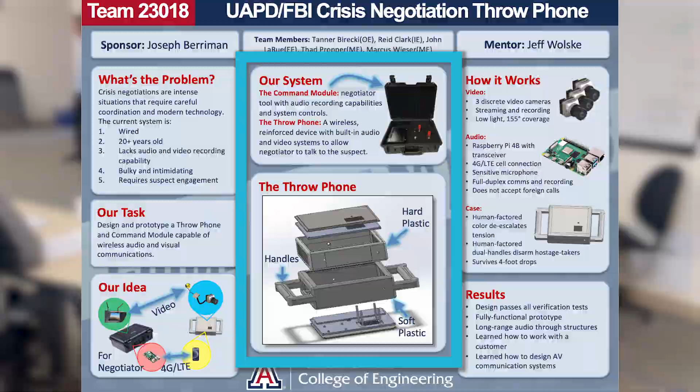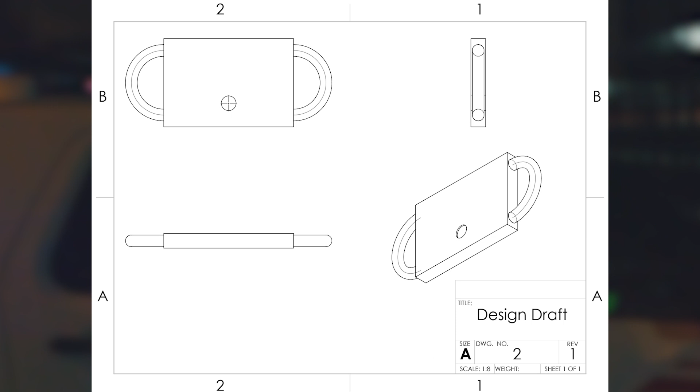We considered multiple different designs and different concepts and their uses. From a trade study, the team determined that a simple Nokia-style phone was best, and then we had the idea of adding handles to this design as a piece of social engineering. Negotiators are trained to keep their right hand free at all times, so they have quick access to their firearm. Using an inverse psychology, we want to provide suspects with something to hold in both hands to keep their hands occupied from holding a weapon. The ability to include these handles to assist in the human side of the de-escalation process sent this design far ahead of the others. Here is the heart of our solution and how it works, starting with the audio subsystem.

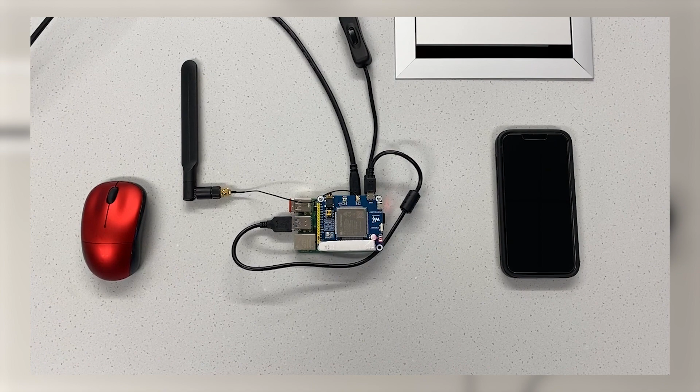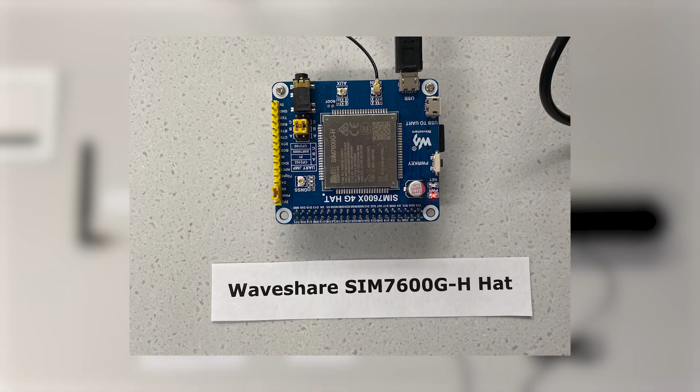The brain of this subsystem is the Raspberry Pi, which interfaces with all the other components as you can see here. It receives power from this battery, which powers the whole system. This is a transceiver. It allows the command module, which is the device police negotiators will use, to communicate with the throwphone. This transceiver utilizes a subscriber identity module, or SIM card, like the one in our cell phones, to connect to a 4G mobile network, allowing it to communicate with the command module effectively and from a long distance. It will receive audio data sent by the throwphone and process it via the Global System for Mobile Communications module, or GSM module for short, sending the data as an output to the headset.

The throwphone utilizes a cell phone that will automatically accept a call from the Raspberry Pi from the command module. These speakers in the throwphone produce audio at 90 decibels from 1 foot away without the suspect ever interacting with the throwphone. This assures that they always hear the voice of the police negotiator even if they don't want to. This setup allows both the police negotiator and suspect to communicate over a full duplex channel, meaning that they can speak and listen to one another simultaneously. This is important so that negotiators never miss what the suspect is saying. And in this subsystem, the throwphone will transmit video data to the command module.

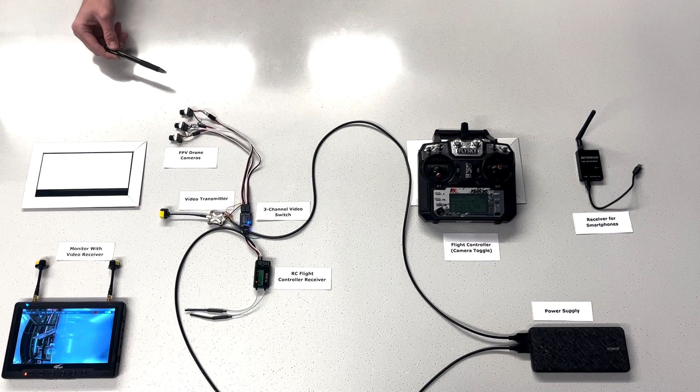We have 3 155-degree field of view cameras on the phone that connect to a video switch. These high-quality cameras are normally used on racing drones and boast excellent low-light performance. The cameras are connected to this multi-viewer, which allows the police negotiator to switch camera perspectives from this controller. The controller connects to the multi-viewer via this receiver.

The multi-viewer sends the video stream of the chosen camera to this antenna. The cameras, multi-viewer, receiver, and antenna are all powered by this 5-volt battery. The antenna transmits the video signal, which can be picked up by this monitor, which also contains a video receiver. This will be stationed by the command module for the police negotiator team to use.

Additionally, the video signal can be picked up by these receivers for SWAT to access the video feed. We want the SWAT teams to be able to see into the scene so they can discern things like where the suspect is, how agitated they are, and whether or not they are armed. This subsystem runs parallel to the audio system so that both operate individually.

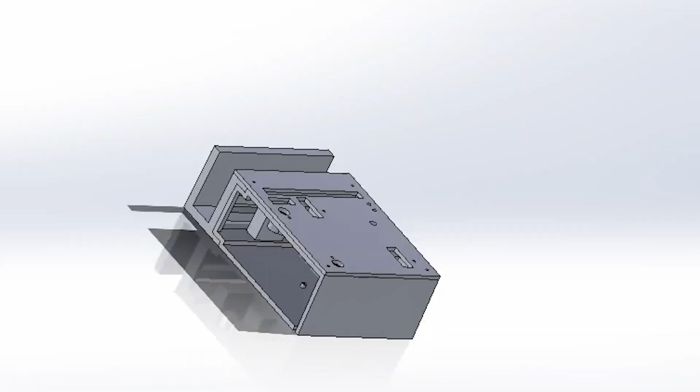The command module contains a transceiver, microphone, and Raspberry Pi for audio, and a receiver with a monitor for the video. Instead of speakers, the police negotiators will plug in headsets to listen to the suspect. The board on top is designed by our team for this project to make the command module easy to interface with. This is all housed in a hard case, which is very familiar to the police force as it is a similar style of case that they have used in the past. And there are no cameras on this device.

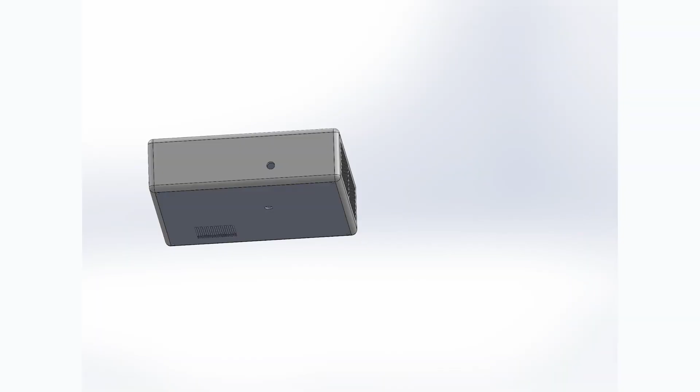A switch here allows police negotiators to turn on and off microphones to control when the suspect is able to hear him. Notice that there is no switch like this on the throw phone. This is intentional because police negotiators want to be able to hear everything that is going on with the suspect at all times. Because this device will literally be thrown through a window, it is important that all these electrical components are housed in a case that will keep them operational and hidden.

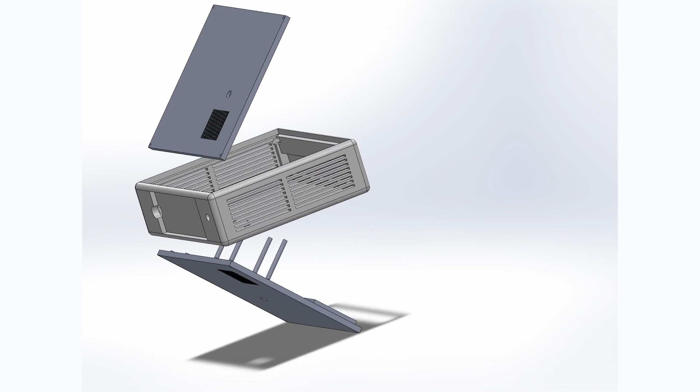This is one part of the two cases the team has designed. This half holds all components in place and protects them from direct drops or strikes. On this side here, we have vents to allow airflow and system cooling to prevent damage to the components due to overheating. And seen here on the front is a compartment for the antenna, which provides functionality of audio and video transmission. The compartment is on the outside of the case so that there is no interference from the signal trying to pass through the material.

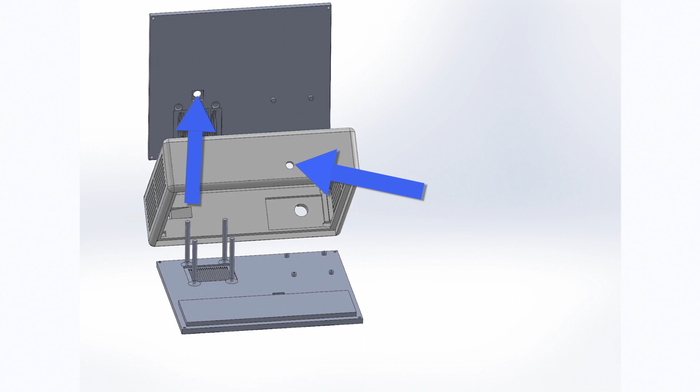Throughout are holes designed to fit the cameras seen here and here. Covering these holes is a thin sheet of acrylic to prevent the camera lenses from being scratched. These vents here and here are for the microphone inputs, and these are mounts for the Raspberry Pi. Here is where the battery will be attached. You can also see that there are holes in the wall of the case to allow for cables to run through to the antennas and cameras.

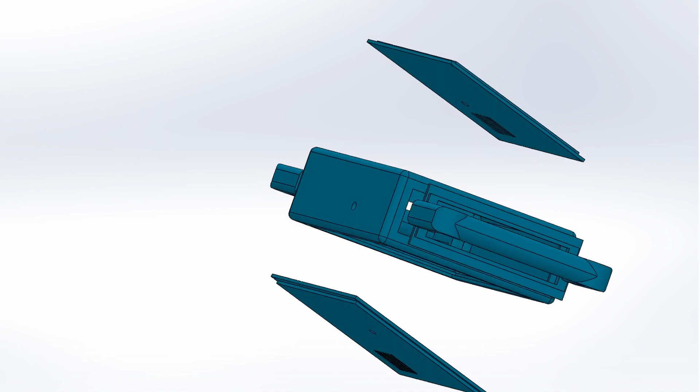This inner case is then protected by a rubbery outer case. This is made of a soft plastic that absorbs the shock when the device is thrown. You can see that the holes for the cameras align with that of the inner case, as do the vents. This outer case is composed of 3 different parts that wrap around the inner housing and are secured with special security screws. The largest piece has the aforementioned handles attached to it.

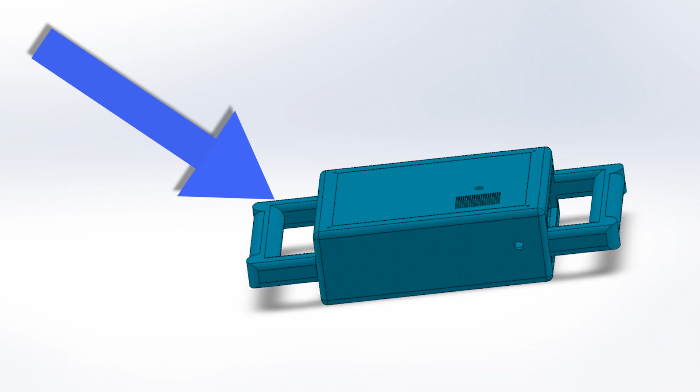The handles are designed to occupy the suspect's hands and keep them from being able to wield a weapon. This is something that really excited our sponsor. He called it a stroke of brilliance. This human factors engineering shows that our team is dedicated to the end user and their goal to de-escalate a crime scene. To test whether or not people unfamiliar with the device would respond to holding the handles, we conducted some interviews with people who knew nothing of our project.